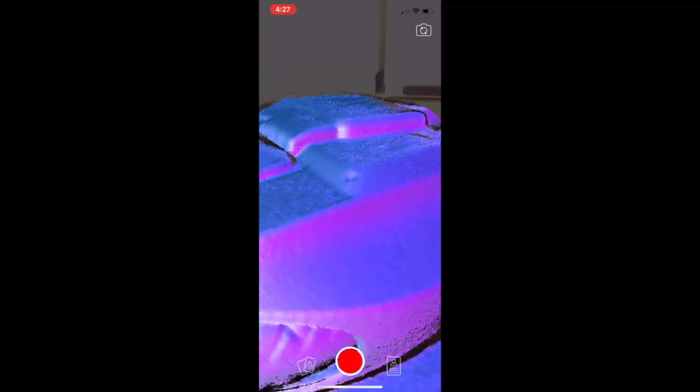In this video, I will show you how to scan a real-life object and then transfer it to computer for future modifying or creating accessories or precise fit parts. So in this case, I have an electric unicycle, and I'm going to create a protection for this corner that will precisely fit and repeat the shape of the edge.

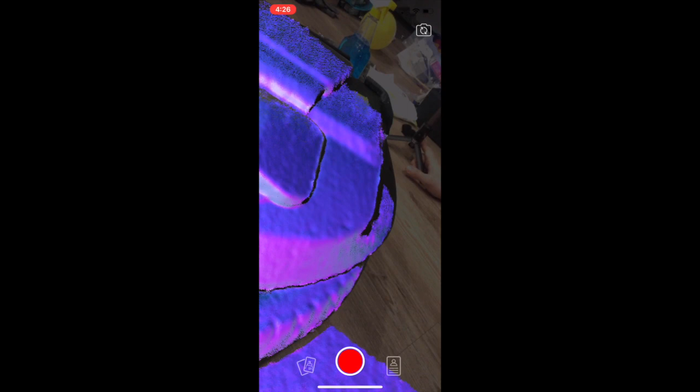So first of all, I will go to the App Store. I'll find the app that is called Capture. This app uses the Face ID camera that is located on the front of your iPhone. And I'll hit the scan button, so you have to move your iPhone really slowly. And this app will create the points cloud, so I'll slowly move around facing front of the iPhone towards the object I'm scanning. And when I'm done, I'm just gonna click record button or volume button.

Now I have this corner scanned, just like that. And I'm just gonna hit save. And then you go on settings and you have to create account. I'm not gonna show that part, it's pretty easy. So after that, we are done with the object and we're gonna move to the computer to transfer the point cloud and convert it into the surface that we can work with.

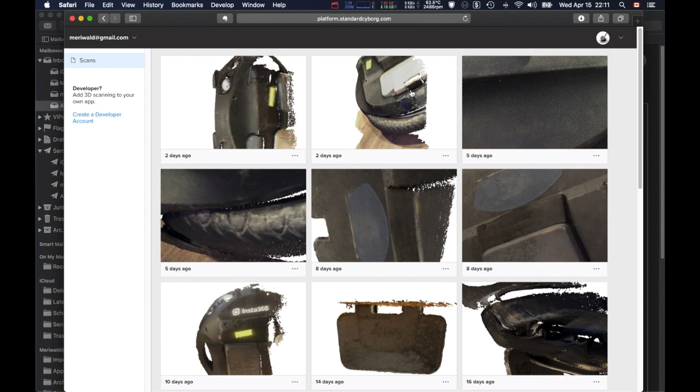You have to go to standardcyborg.com and sign in with the same account that you have created on the iPhone. Download a scan that you made. Download PLY. Now you have to open Meshlab.

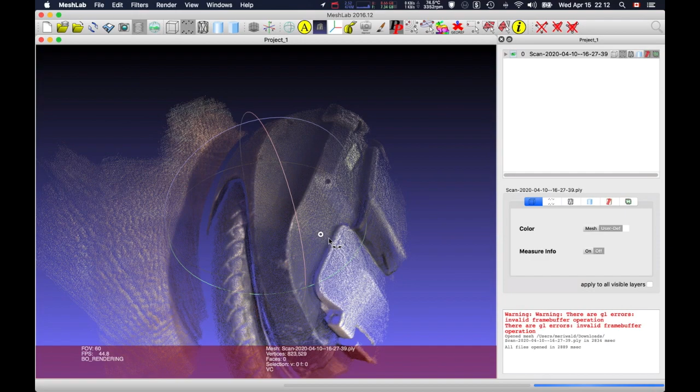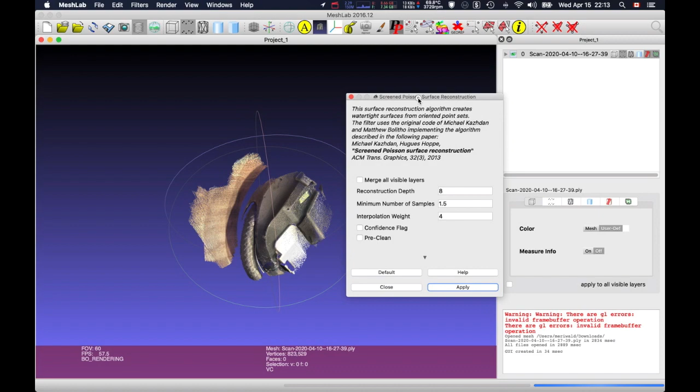So drag your file into here. This is the points cloud and we're gonna make it a surface. Filters, remeshing, and the last filter, screened Poisson surface reconstruction. I always go with default settings, but if you don't like the result, you can play with this. There is a manual on their website. If you go back to this website, you can follow this process to do adjustments, but defaults are working pretty well for me. Okay, so you can see now this is surface.

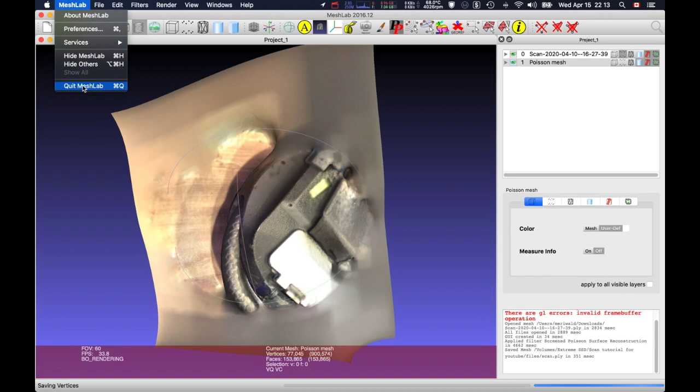That's what we need. You select this last mesh, file, export. We're done with Meshlab. Now we need Blender. In the Blender, delete all this extra stuff. A, X, Enter. Then you go File, Import, PLY. Scale of this object is always wrong, and you have to multiply it by 1000 on each axis. Right click on the object, set origin, geometry to origin.

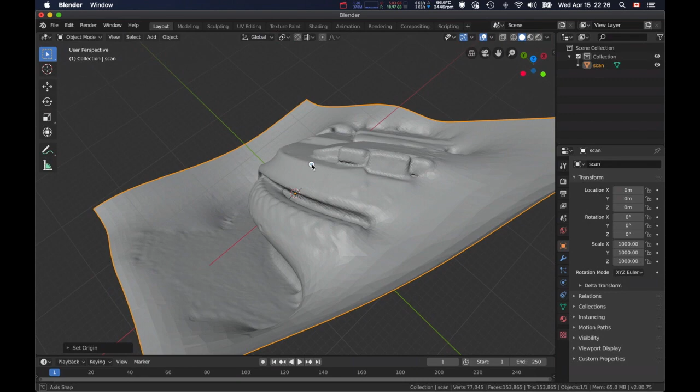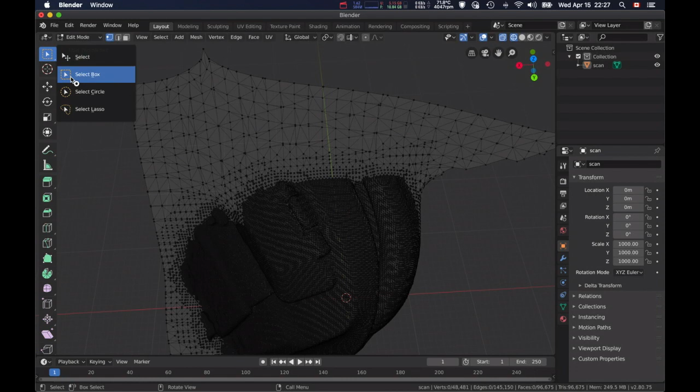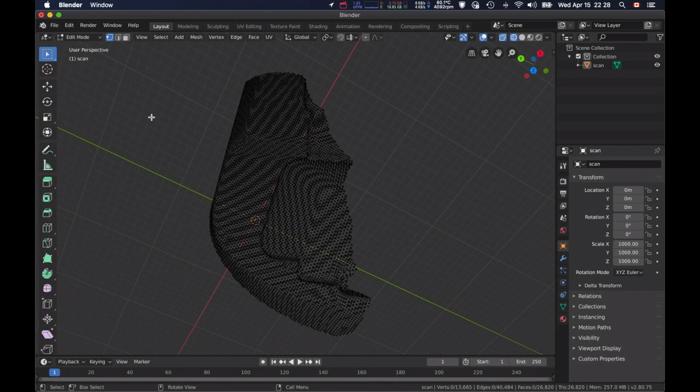After fixing the scale, we have to clean the model. You have to switch to edit mode, just hit tab, Z, wireframe. I will clean everything that I don't need. So you just select all those vertices, X, delete vertices. Just select whatever you need, say this corner, and then invert the selection, Command I. X, delete. So I have to switch to object mode again over here, or just by clicking tab.

You can see how many faces we have here. Too many. So Fusion 360 won't be able to work with that many faces. That's why we're gonna reduce them. Scan quality can be not so good as I have here sometimes, and you can just smoothen the surface by applying this modifier. So you select the object and then you do smooth, use the default settings, just hit apply, and it's gonna do the job.

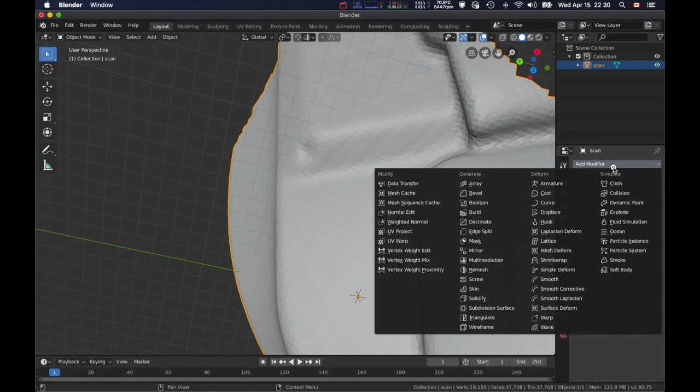So I don't need this one. I need decimate to reduce the amount of faces. In decimate, you select planar, and in wireframe you can see right away. So it has removed all those faces on flat surfaces. Over here you can adjust amount of details.

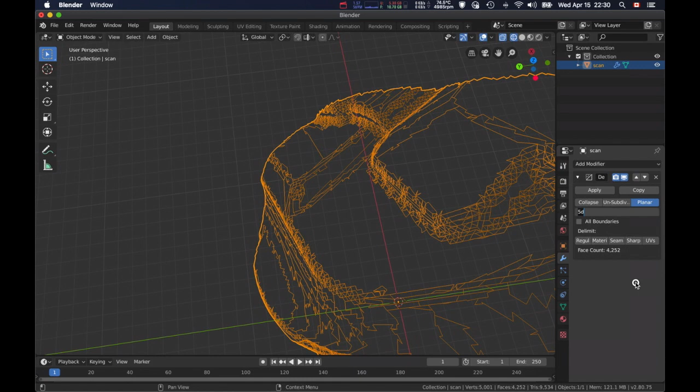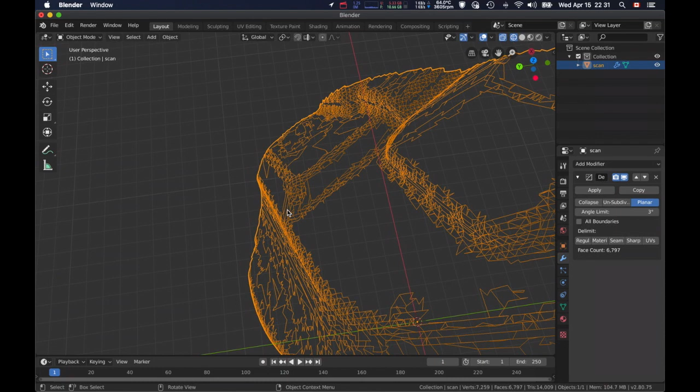So if you feel like you lost some details on the object, because definitely you're gonna lose some definition, you can decrease this angle, let's say to 3. So here we have 5, less, and if you go with 3 you have more details, right? But remember, when we move this to Fusion, if amount of faces is still too big, Fusion will refuse to work with this file. So always keep it on 5.

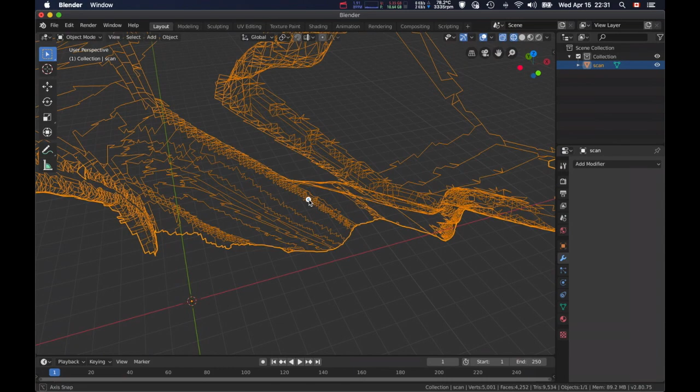Apply. So for now, this is not the object, right? It's still the surface. And Fusion 360 also is not very good working with the surface. So we have to make a body from this. You can see it has 0 thickness, right? So there are 2 ways. You can add solidify modifier. So this will add thickness to the surface, and you will get the body. You can use it in Fusion.

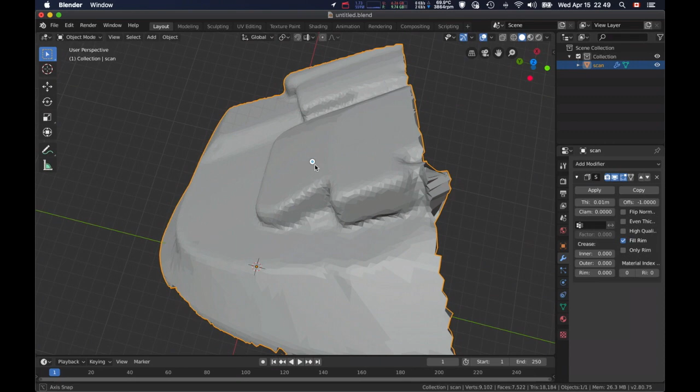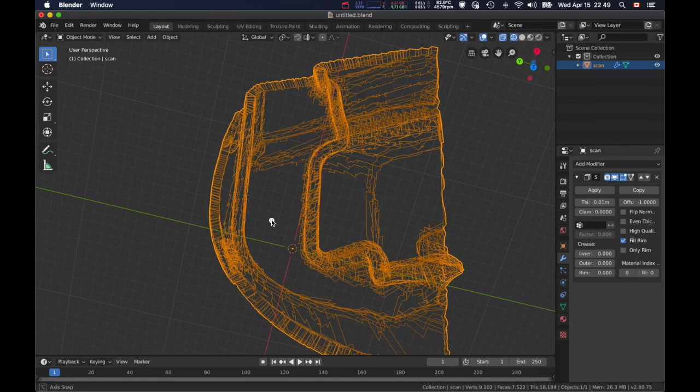But what I don't like about this method is that you increase the amount of faces. So you have faces on the front, and then you have faces on the back over here, right? So it doubles the amount of faces. And if your object has a lot of details, then this can be a problem. There is another way I like. I'll add the cube over here. Click G to move it around. Then G and R to rotate.

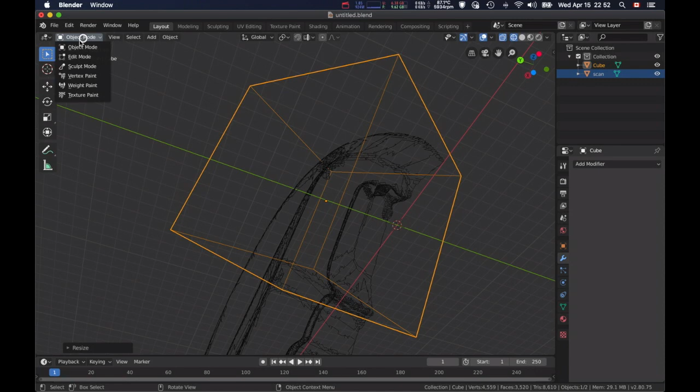G, S to scale. Switch to edit mode, select face. I'm gonna select the bottom face and bring it inside the model, so this cube has a complete intersection with the surface. It's completely intersecting with the surface. It's good.

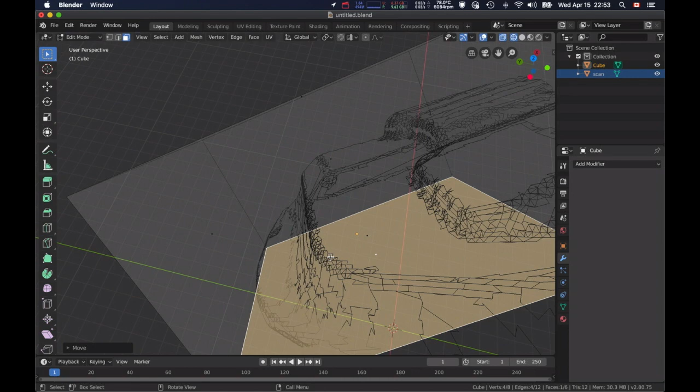Go to solids, select the cube, add modifier, Boolean, and here you select the object scan. Okay, and depending on how you position the cube, you will have to select difference or intersect. So right now we have difference by default, and this is what we need.

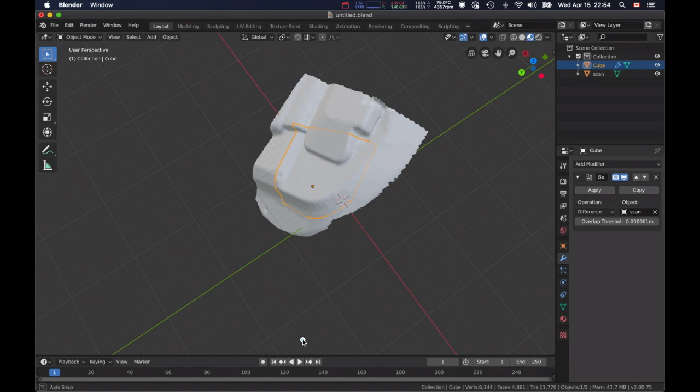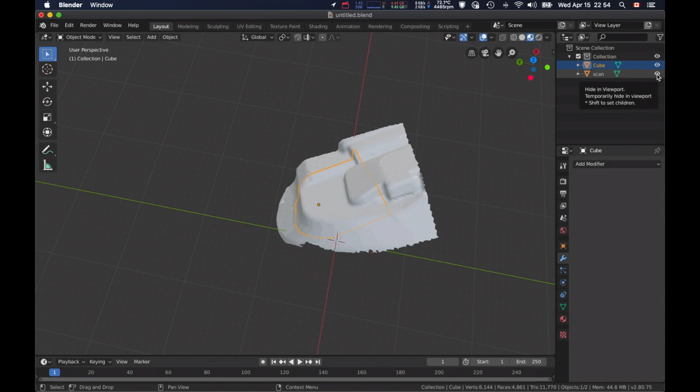So you click apply. If you see that this cube is actually on the opposite side, then you have to click intersect and it will change. But in this case it works with difference. So you click apply, and then you have to hide the scan, and here we have a nice clear object.

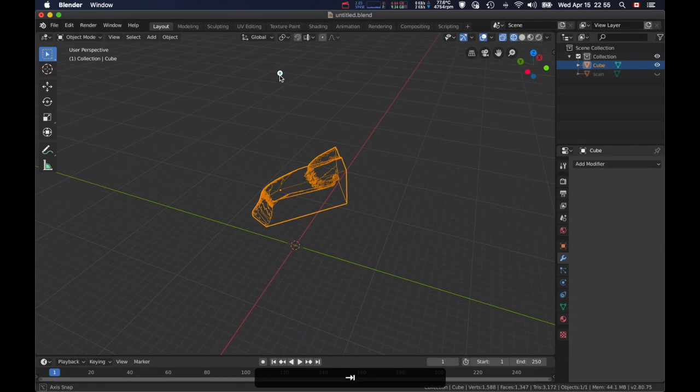I just noticed some garbage over here. Have to delete this. Yeah, so now we have a nice pure object. It's only one face on the bottom, one face on the sides, and this is a pretty detailed, low face object.

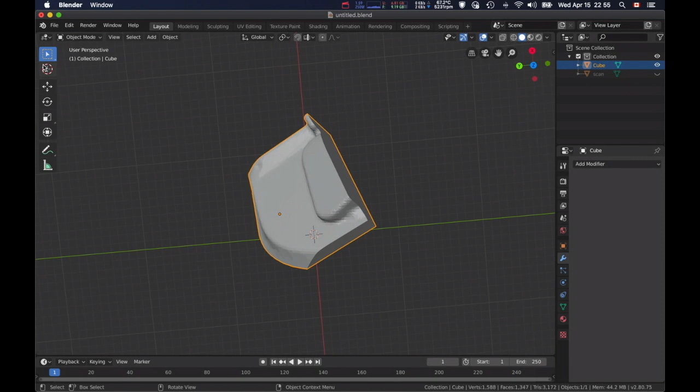So after this I will export this as an STL file. First you have to select only this object, only the cube, file, export, STL. Okay, and here it's very important, you have to select this, selection only, export.

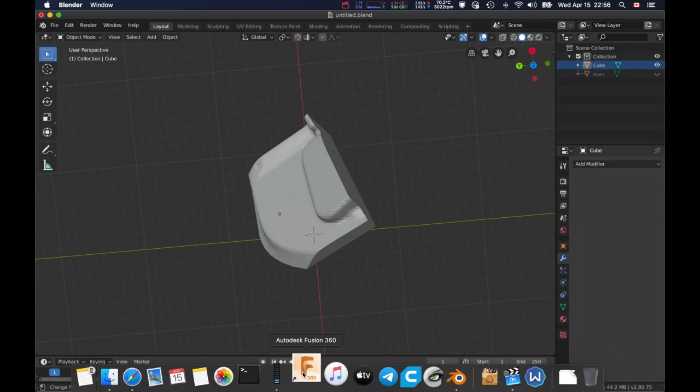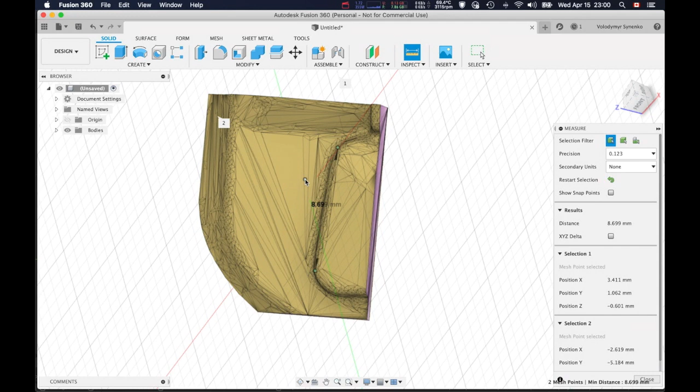So I'm gonna open Autodesk Fusion 360. After you open Fusion 360, you have to turn off design history. Now I'm gonna insert mesh, STL. First thing I do, I'm checking the scale. For example, I know approximately how long this distance is. It says that it's 8 millimeters, right? I know this is wrong, this is about 8 centimeters.

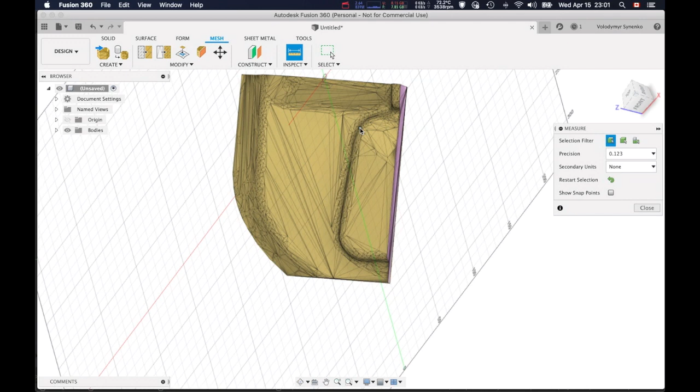So I have to go to mesh, modify, scale, select the mesh, and I change the scale factor to 10. Okay. So now if I check this, it's 86 millimeters, so perfect. I have to go to surface, modify, mesh to BRep. Select the body, okay. You see it doesn't give me any warnings, because the amount of faces is really low.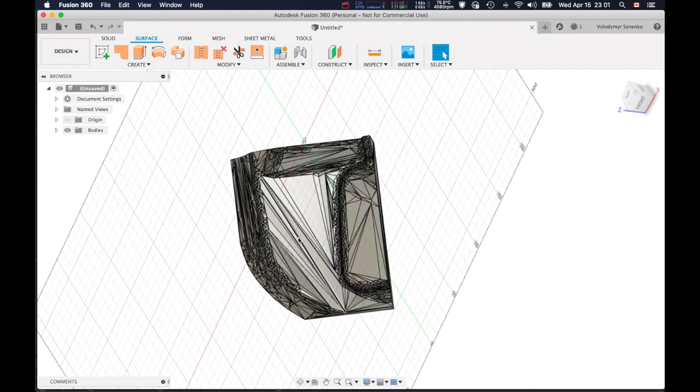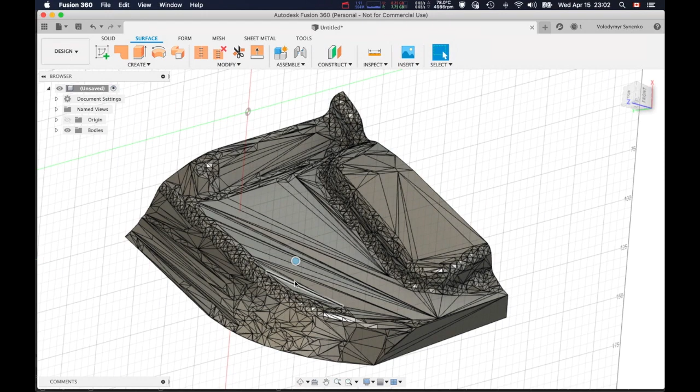So basically this is the object you can work with, you can do whatever you want. Here you have your real life object transferred to Fusion 360 and ready for any modifications. I'm just gonna show you an example of what you can do. So first I'm just gonna put back the capture design history.

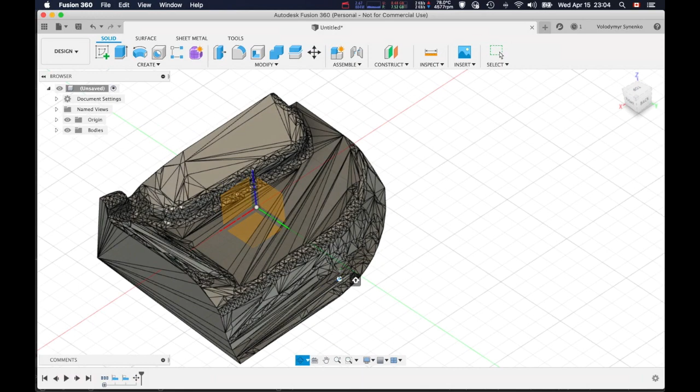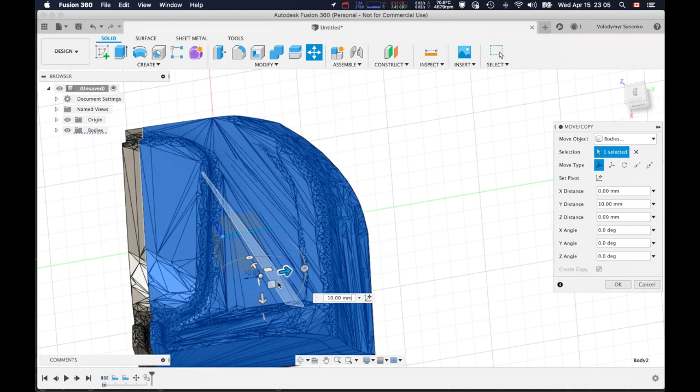So what I can do, like I was talking about, is making protection for this corner. The simplest way to make protection here, you just take this body, select it right here, and I'll go 7 millimeters this way, 7 millimeters up, and 7 millimeters this way. So this is our original body, this is the copy.

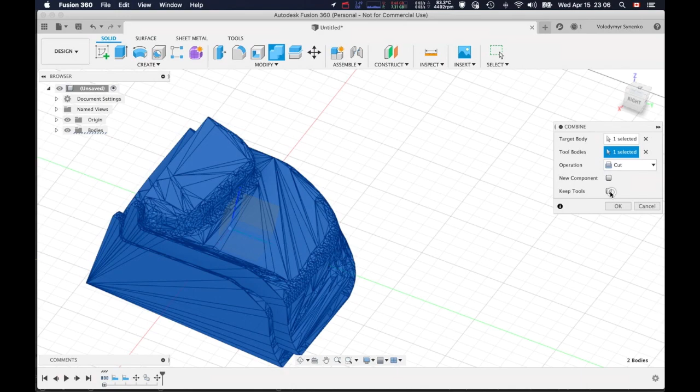I'll go to combine, target body is the copy we just made, and tool body is the original body, and I'm gonna cut it, and I'll keep tools. So now I have this roughly 7 millimeters thick cover. I don't need the entire thing. I'm gonna create a sketch over here. I'll go this way.

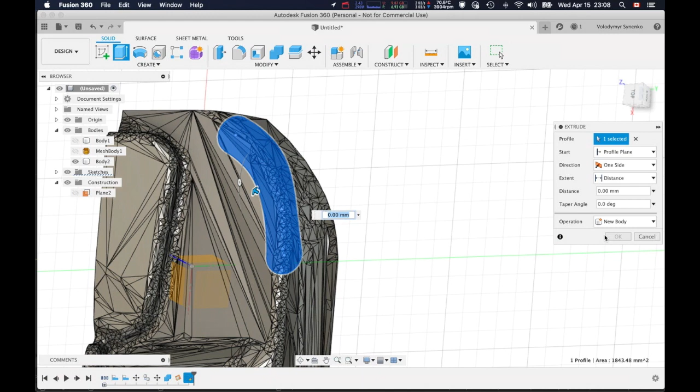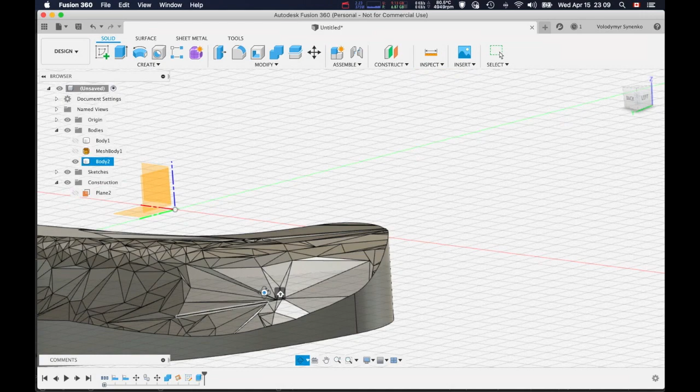Just gonna extrude this down. Intersect. So here you have your protector. So the only thing you have left to do is make it look not that rough, apply some fillets. The other way is more complicated and gives you more freedom. Again, I'm just sharing my experience, so it may be useful for something else.

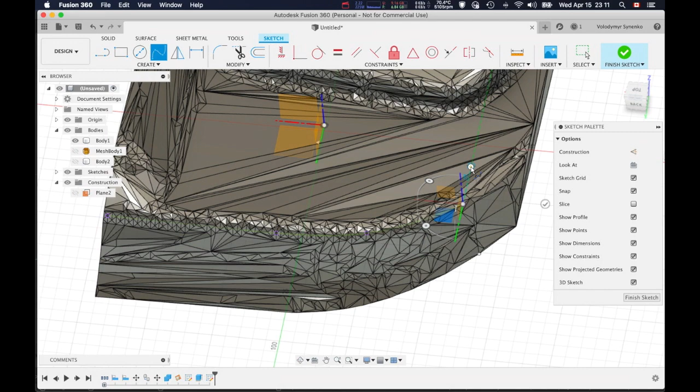So I'll create a sketch, it's gonna be a 3-dimensional sketch. So create, include 3D geometry, and I'm just gonna include some points over here along the edge. Okay. And I'll make a line here. And now I want to create one more sketch on the edge here. Okay, this is my face.

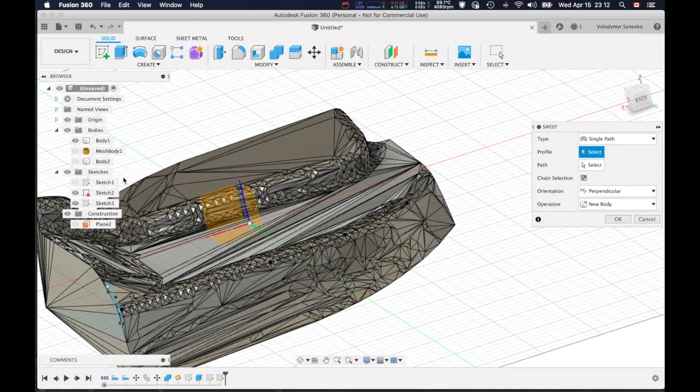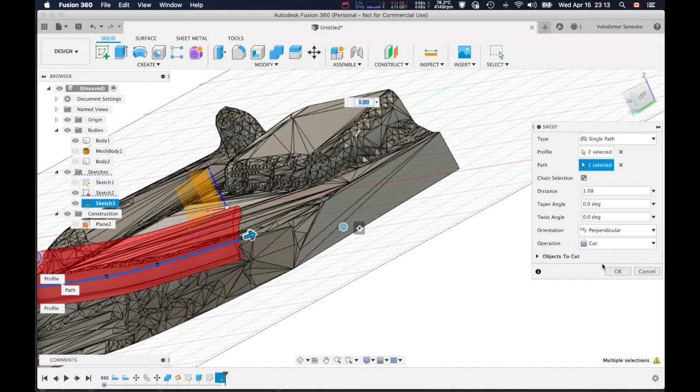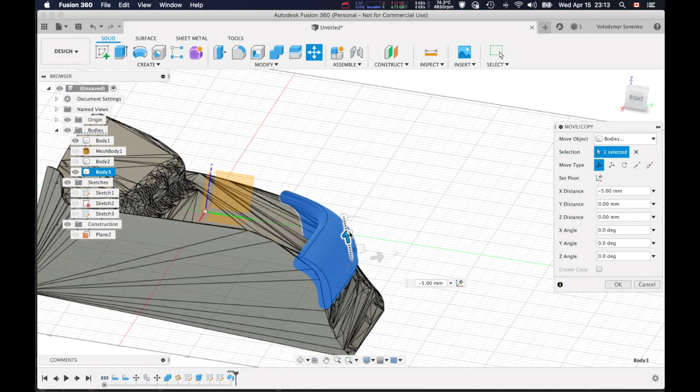Now guess what? We will do a sweep. Select this face, and the path will be our line over here. Okay, good. And it will be a new body. So as I said, you have more control this way. I can move this a bit down. Okay, that looks very good to me.

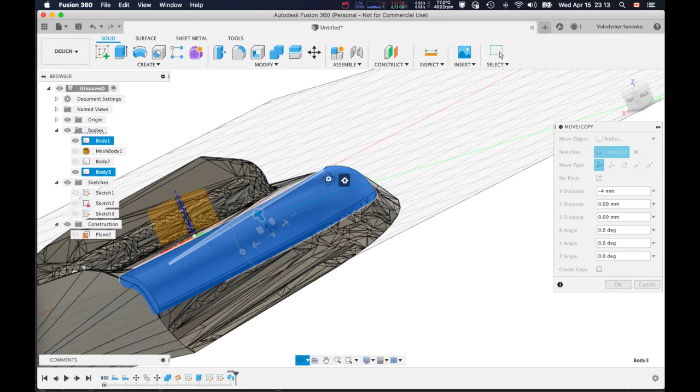Click OK, and now I'll do the same. So I'll cut this body. This is target, this is tool, and keep the tool. Okay, and again, you just got the perfect fit protector for the edge.

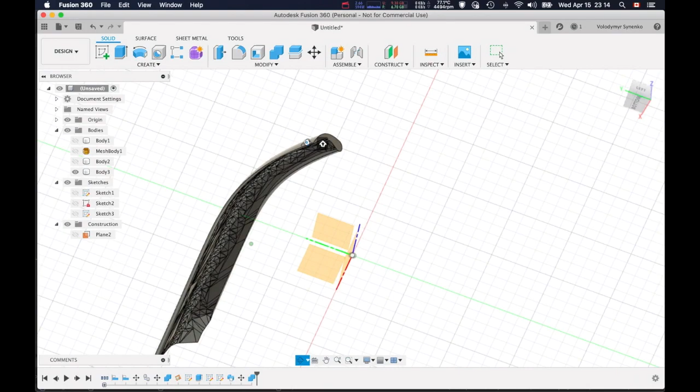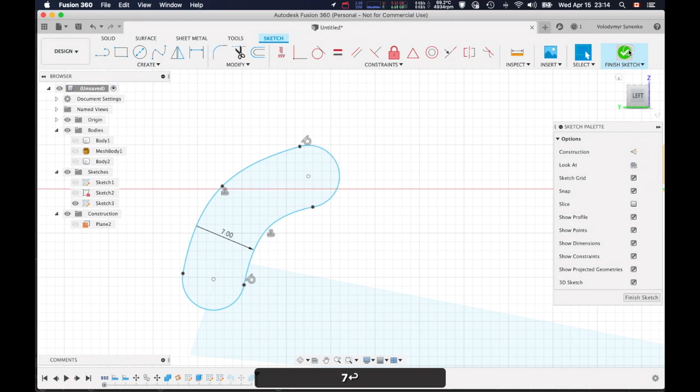If you feel like it's too thin, you can go back to the last sketch I did. Make it thicker. Now we have it thicker. So yeah, it's like that, and then you can 3D print it and protect your wheel or whatever you're gonna make with this.